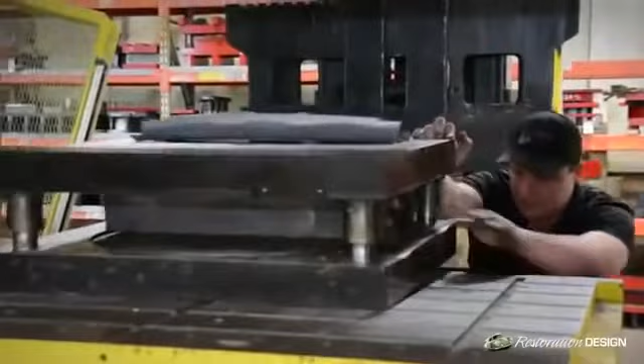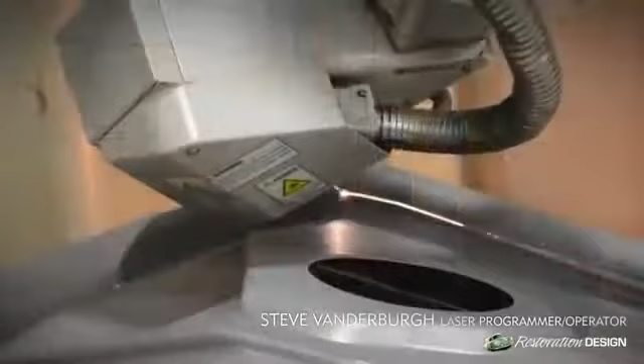Now this is no easy task, and only by using the team and networks we have working with us will it be achievable. From Mike sourcing cars and parts info for us to the guys on the shop floor - Pete, Kung, and myself who do all the tool design and troubleshooting, our fastidious laser operator Steve, who programs our 5-axis laser and is one of many checkpoints for quality.

Chris, who really has one of the more labor-intensive jobs in the shop, does all the tool loading and stamps the thousands of parts we make on a yearly basis. And then Paul, the welder fabricator, who I lean on a lot when I need high-quality work done. He's the one responsible for all the beautiful assembled parts you get delivered to your shop.

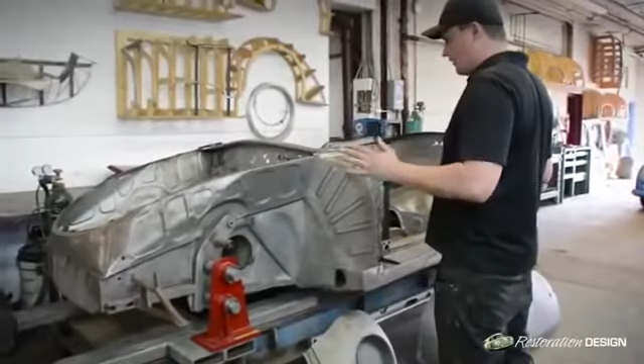So one of the first things we needed to find was a straight quality Speedster, which is really hard to find. Luckily, Mike found this 56 Speedster out of Baltimore, Maryland from another Porsche guy he knows, and it has all the components that we needed from the car.

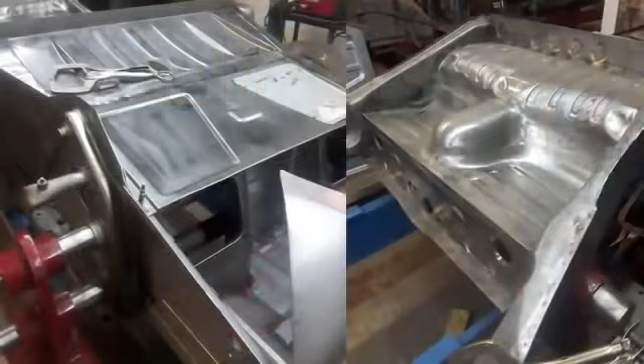In particular, we needed this front beam assembly. We needed it to be strong and straight, as well as the rear torsion area, just so when we're putting it on the bench, that we know that the car is straight and true and matches up with the limited amount of Porsche drawings that we have.

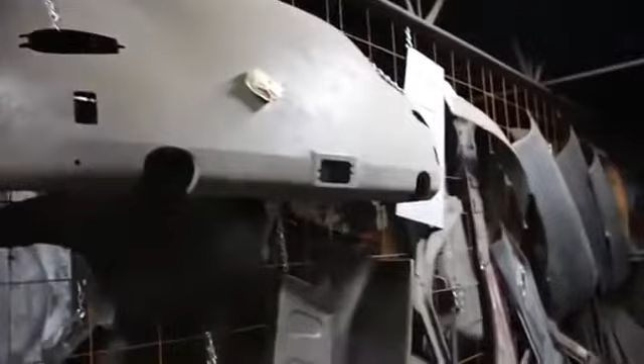So Mike did have a couple other Speedster chassis, but they were so far rotten that they would have been useless to us. But what they do provide is a couple good measurements on certain parts and certain areas of the car that we can relate and match up to the current car we have.

This car in particular has some early A dimensions, as well as we've noticed some B dimensions, which kind of tells us that maybe Porsche had some parts on the floor that they just wanted to use and they stuck on the car, which we know they have been known to do.

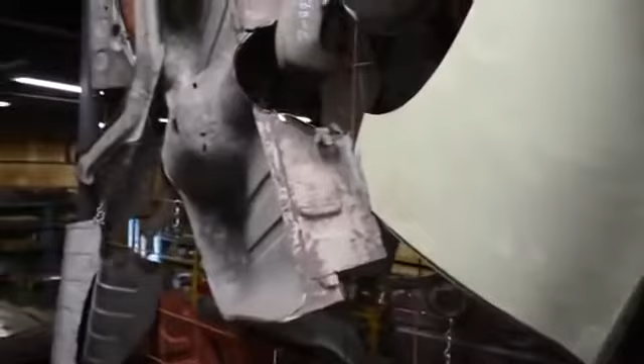So one of the biggest areas of differences in these cars is this front section, this front clip section. There's a lot of different variations. These cars were pounded together, and it's very hard to take accurate measurements off them, which is why we use 2 to 3 cars to get a very accurate measurement so we can split the difference and find where mating the panels will work best for us.

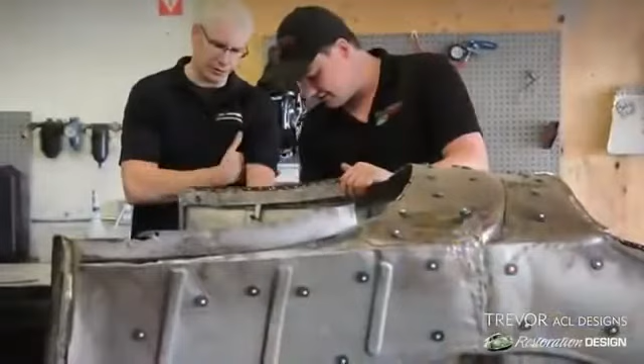I'm Trevor from ACL Designs. I work in partnership with Restoration Design, and what we do collaboratively is we're putting cars together based off of laser scanning, and this is part of how I'm doing it.

I've got the retroreflective targets. I'm optimizing a laser scanner, and in connection with that and some factory drawings, we're able to put proper CAD models together.

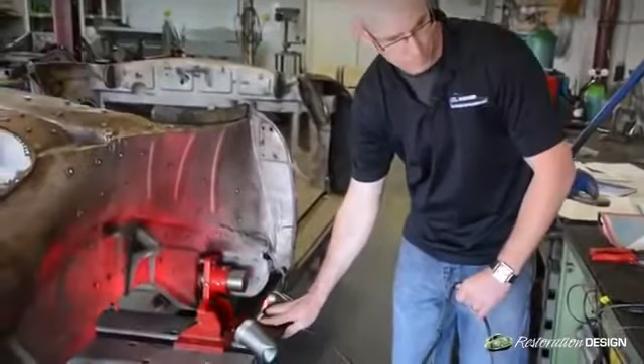So it starts off with a nice scan, high accuracy of the actual car. And then from that, with the factory drawings, we'll put together an accurate CAD model that is based off factory dimensions and based off of what the actual car is. We also want to kind of capture the as-built of the car, which sometimes differs from drawings, but it's a nice combination between the two.

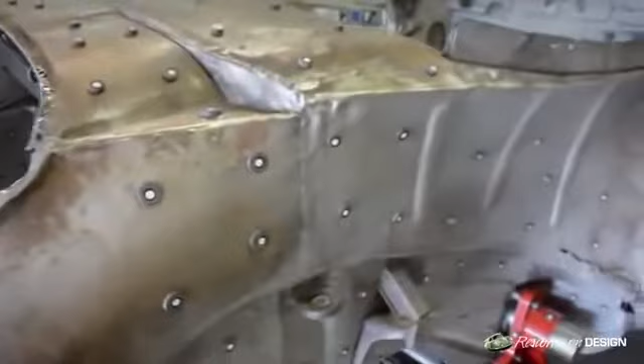So this is a 356A. The serial numbers represent that. And what we try to do as well is referencing the serial numbers by scanning the car and making sure the dimensions from a 356A match the car itself, the drawings in the car match up.

And so based off of that, we can also kind of confirm that other parts weren't swapped in from a B or a C. And we confirm this is an A car, and what we produce is the exact thing. So when you take this back to your shop, put the panels on, everything matches up to your fixture and factory drawings. So what I'm doing right now, the scanner is...

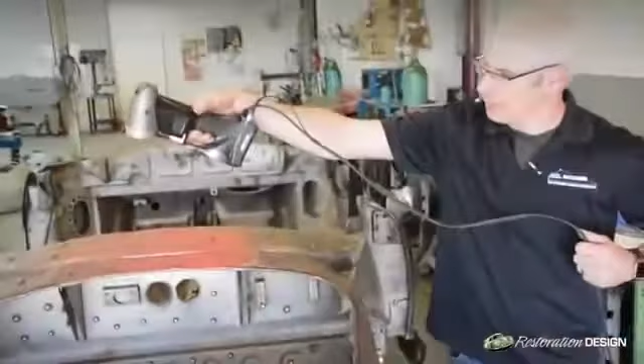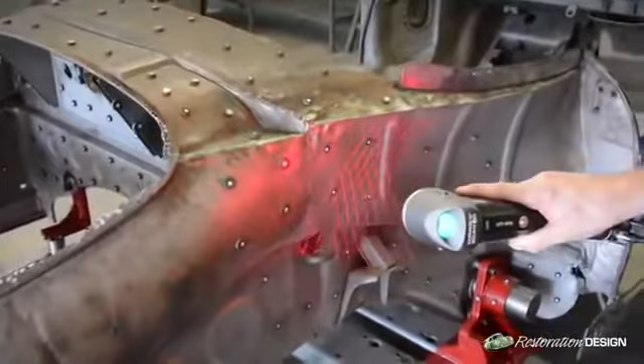...optimizing with the retroreflective targets to pick up as a reference. It's dropping points down 10,000 a second to get the data. With this technology, I'll start off with plus or minus 1.5 thou, which is a good start.

By the time this is done, we'll put it back to factory specs, and we'll have the built-in tolerances already ready, so that when they make these parts, it's just as if they were making it back on the plant.

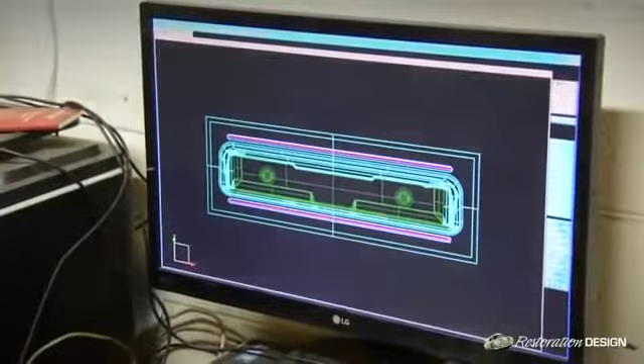Hi, my name is Quang Lee, and I'm a CAD/CAM designer and programmer at Restoration Design, and I can show you how we develop the tool design and manufacturing at Restoration Design.

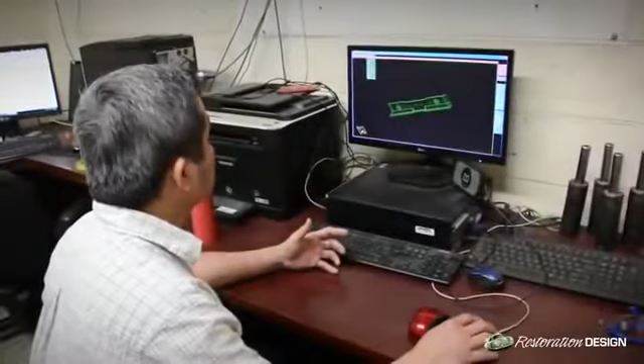What I have here is the scan data of the original part. I receive the original scan part data, as you can see on the screen right here, and from there I develop the tool that will produce that part.

At Restoration Design, we design, machine, and manufacture from beginning to end. Right now I have a part here, and I'll show you. This is the product after I designed it.

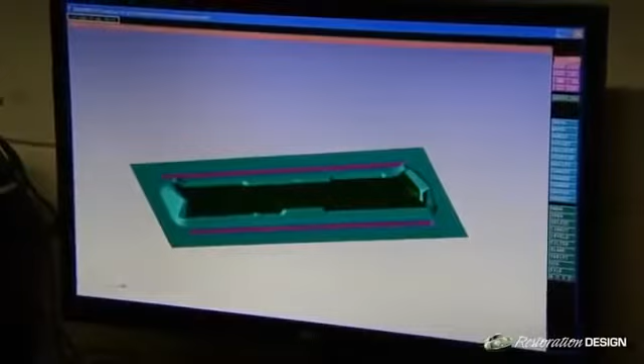You can see in the screen there, the green color is the part, and whatever the other color is, that's the mold. So when we make the part from the mold, you get the shape of the original part in there.

And after that, we stamp, and we go to the laser machine to cut the part.

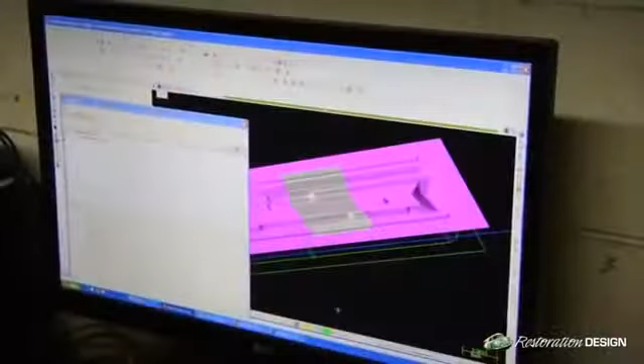The next software I'm using right now is on the same part as you saw earlier. This is the CAM software, so it's going to help us program the CNC machine to machine the tool.

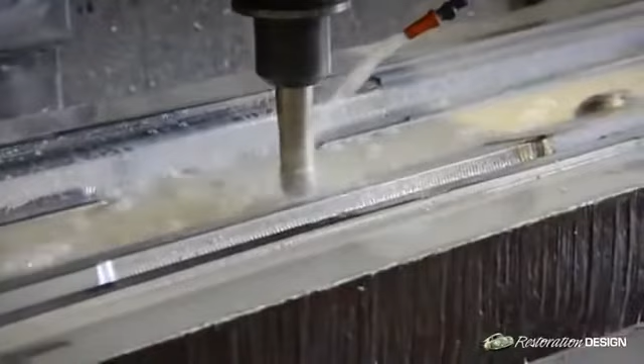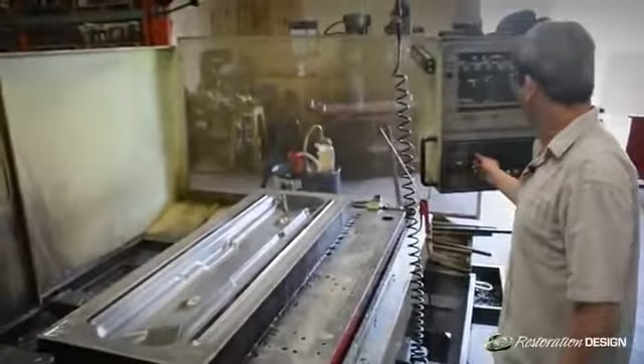Now you can see this is the same tool we saw earlier on the computer, which I'm making right now. I'm in the process of semi-finished machining for the mold before I run the final finish to get a better finished surface.

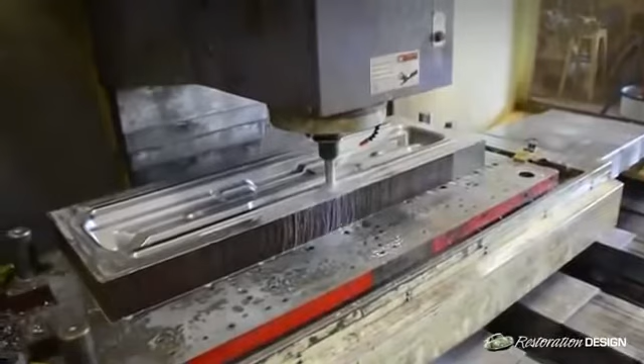We have the capability of designing and producing at the same time, which helps us continuously improve the part that we make. So if we have any feedback from the customer, we can make engineering changes to the mold right away to improve our part.

I constantly work with the production manager to get any feedback from him, and I can go back to the design and make modifications that improve and make the part better.

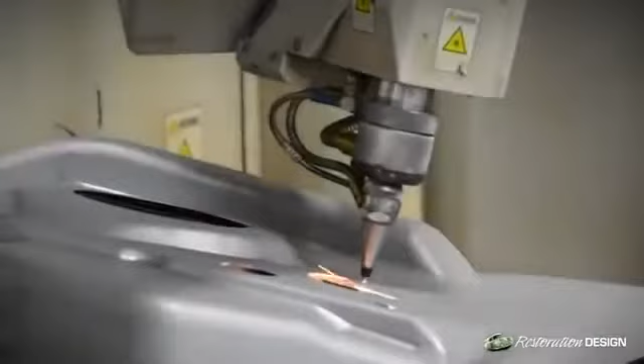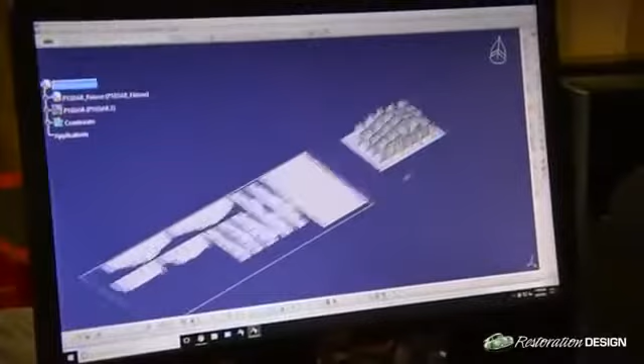Hi, I'm Steve Vandenberg, and I'm the 3D laser operator at Restoration Design. After I get the CAD data from the tool guys, I'll make a jig profile and nest it as well. After that, it'll go to Norm at the 2D laser.

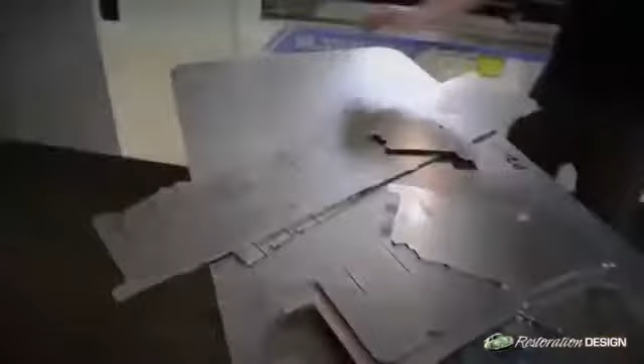He will cut it out and then assemble it like a puzzle, and it'll be welded together by Paul, and it will turn out like that on the bed.

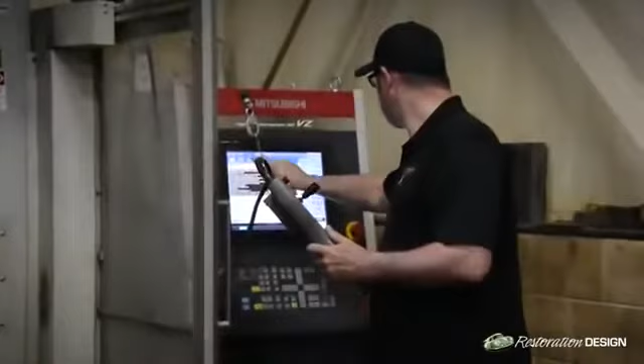So when I receive it from them, I locate it on the bed, and then I program.

I'll run a ghost program just to make sure there's no crashes in real life. So I'll run a simulation right now, and this is really just showing what it would do in real life when it's on the bed running.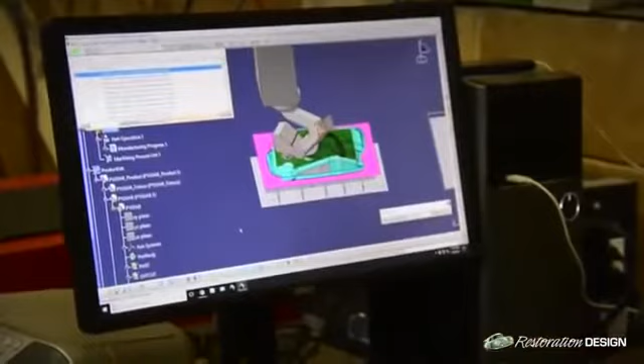The CAD data doesn't always fit the actual part, so we use OEM parts to make adjustments to make the part as good as we can, and then I take it over to Norm and they try it on the chassis.

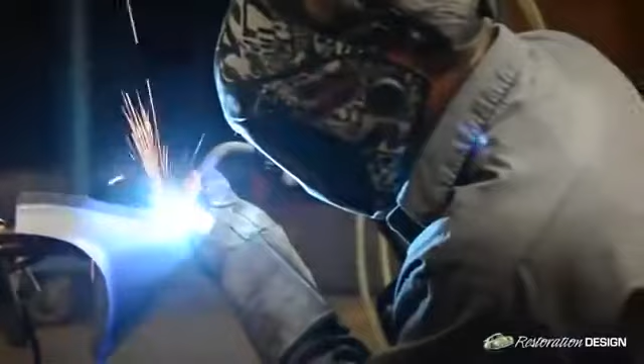Hi, I'm Paul from Restoration Design, and I'm a welder fabricator here, and today I'm going to go over with you a jack spur for a 356.

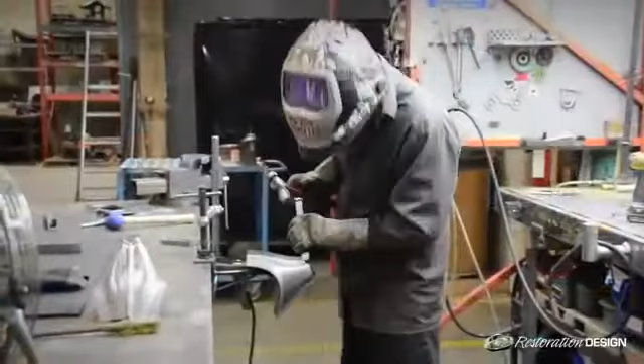Basically, not all parts in this shop are stamped, pressed, and sent down the row. A lot of them come to me for the other side of life, which is sheet metal banging, custom, and handmade parts. A lot of customers depend on us to provide them with parts as close as we can possibly get to OEM specs, and that's what my job is — to get all these parts to OEM specs, basically hand bang them, weld them, fabricate them, send them down the line, and spot weld them.

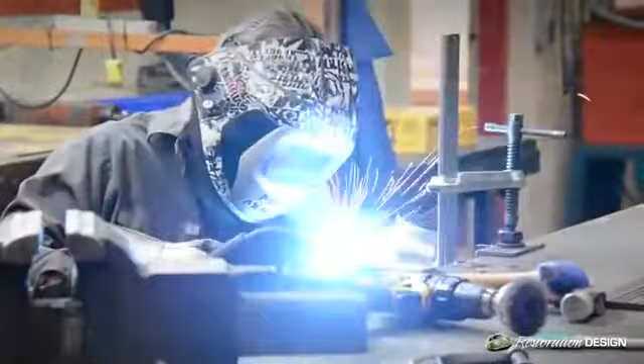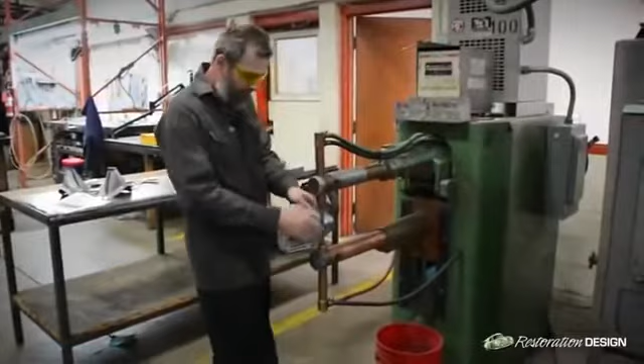When it comes to making all these parts, I have a bunch of welders and spot welders available. I have here your basic rocker arm spot welder that was used on the Porsche production line.

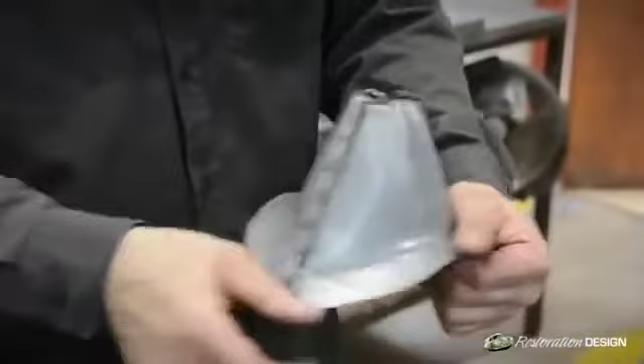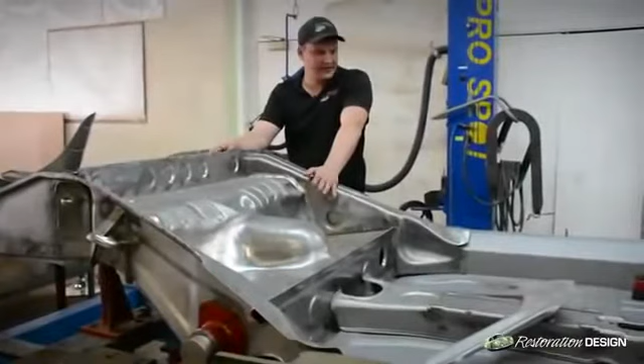I have a couple more that weld nuts, over on the far side, for studs and bolts where it requires some sort of torque going into these, and it needs to be stable. What we have here is what we like to call the Ersatz chassis, German for spare chassis, and this helps us conceptualize and mock up our panels as we produce them from the production line.

So we mounted it on a Celette bench with fixtures which we got from J3.

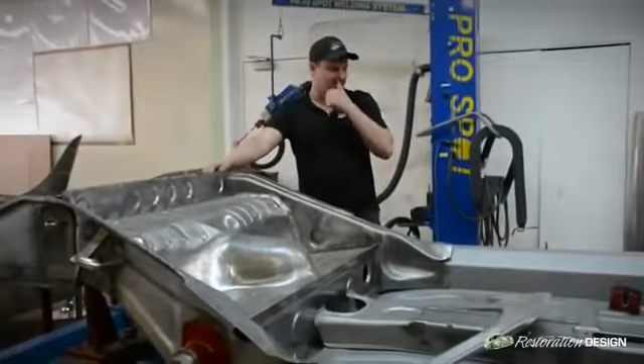This allows us to get proper measurements and really see how the car is assembled and how it's supposed to be put together. From here I can figure out what sub-assemblies I can make off the bench, then bring them in and weld them where the factory welds are done. Right now we're kind of at a standstill because we're waiting for the engineering process to stamp some more dies.

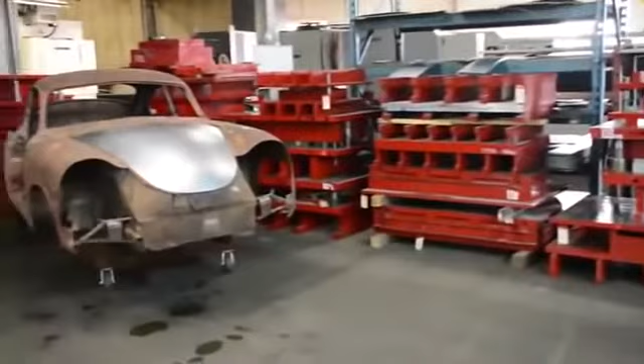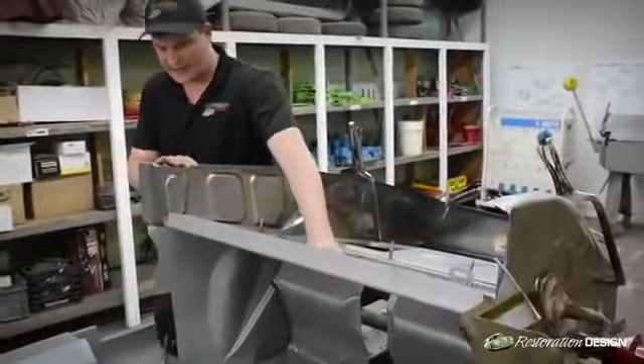Right now we're at this front section area where we've noticed we want to retool some of our parts. Instead of doing them in 2 panels, we want them in 1 panel, just like they came from Porsche, as well as finishing this front pillar here for the door hinge. So this is next on the list to get made. When that's made, it'll be put together just like this original NOS panel here.

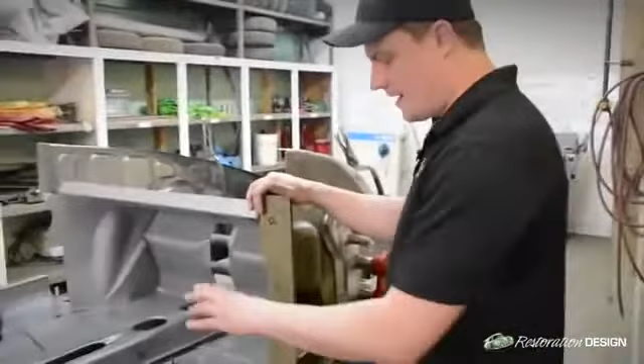We're going to make this as a sub-assembly, and that'll be available for purchase at some point, and that will allow me to put it on the car and weld it with a spot welder.

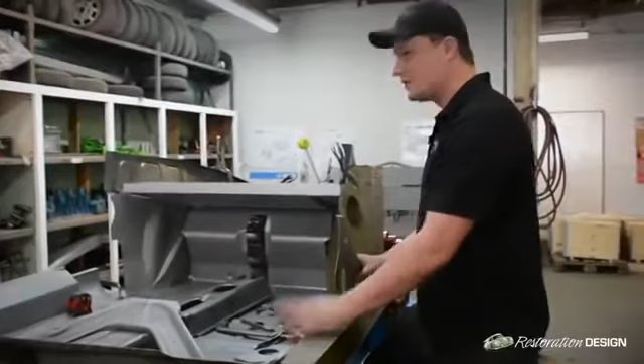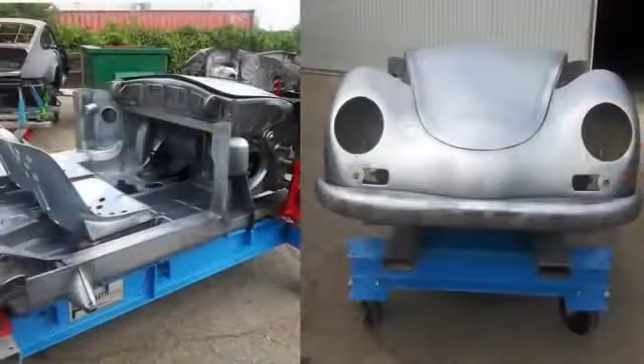Once a part has been cut by Steve on the laser, he gives it to me and Rob, and we mock it up using the limited amount of Porsche drawings that exist, as well as the other cars we have at our disposal, around 5 or 6 cars at any given time, to match up the dimensions and where they go in relation to other parts in the car.

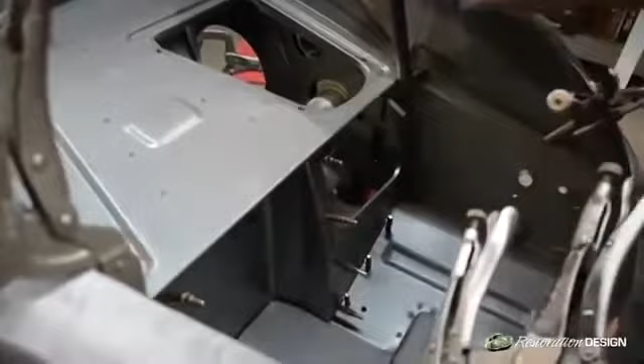So one of the tools we like to use here at the shop are these things called clecos, which are kind of like a rivet and hold the part firmly in place. As you can see, this is not welded together, and it barely moves. This allows us to quickly take the panel in and out for quick adjustments that either Steve or myself have to make on the fly.

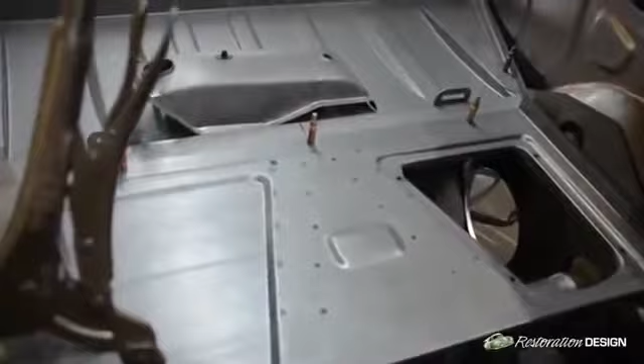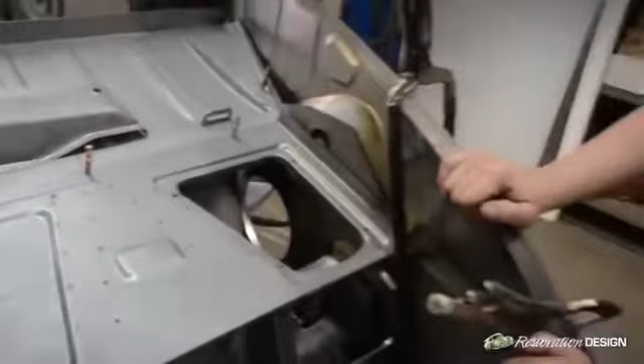We also use C-clamps, and some parts need to be tweaked. When we realize they need to be tweaked, they'll come off, and either Pete or Kung will make adjustments to the tool, or Steve will make adjustments on the laser until they're 100% perfect. Then they'll go in the car and get welded in.

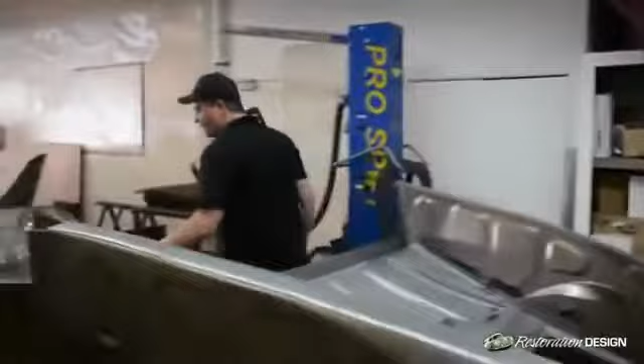And then that's what you have over here with this fully finished rear chassis assembly, which Rob from Pithead Metalcraft has made fully by hand. We don't currently sell this, but eventually it'll be on the list to make. He's made this one by hand, and it's all welded together solid. The measurements line up. It's a beautiful piece, and I can't wait to finish the rest.

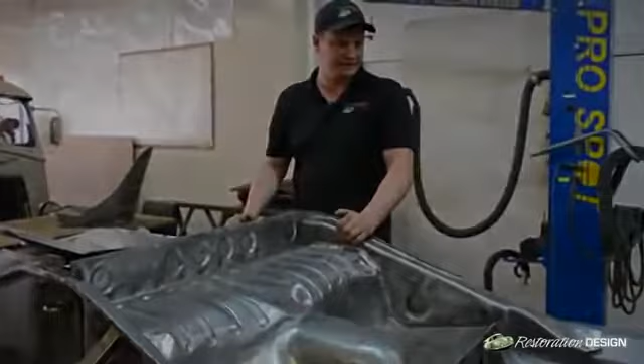So this here is what it's all about, this beautiful '54 Speedster that was professionally restored by Manny at Cambridge Collisions, who did a beautiful job. This car was pretty much rotted into the ground when it started, which is why it wasn't one of the ones we used for our conceptualization.

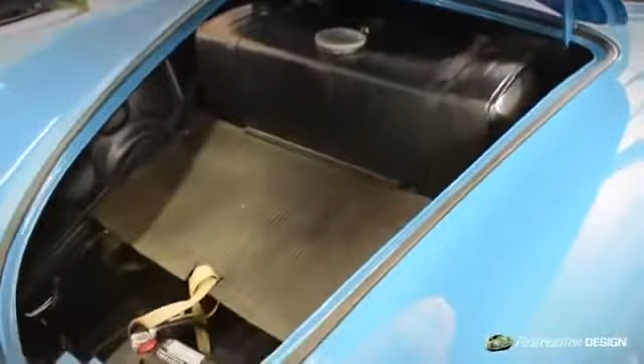It has pretty much all the panels that we sell on it. Let me pop the hood here. Inside it's beautifully done, full original battery box—well, not original, but replica, to the correct year. You've got the inner fenders here, beautiful gas tank. Just a beautiful job.

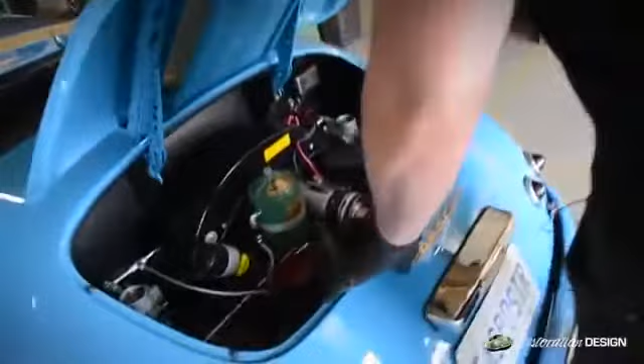This motor was built by one of our friends in Michigan named John Wilberg. He does beautiful work, and as you can see, all the sidewalls are beautiful. The engine tray is beautiful, matches beautifully with the engine seals.

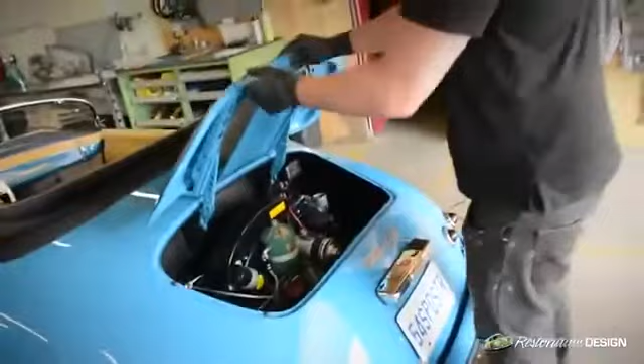The front and rear bumpers are ours, the fenders are ours, the hood—which is one of our biggest projects we had at the shop—is ours, and it matches beautifully. The floor pans, the tunnel, I could go on all day. But this is what we want to produce, and this is the end goal, and it's just a beautiful car.

As I stated earlier, this is only one of many projects we have here at the shop. We're still committed to making 911 and 914 parts, and you can still expect the same quality out of those parts as we have in the past.